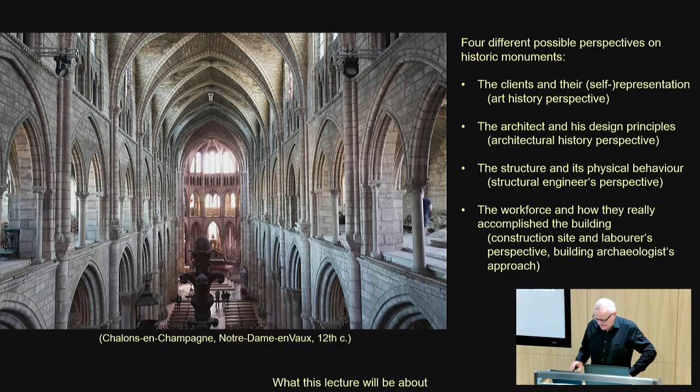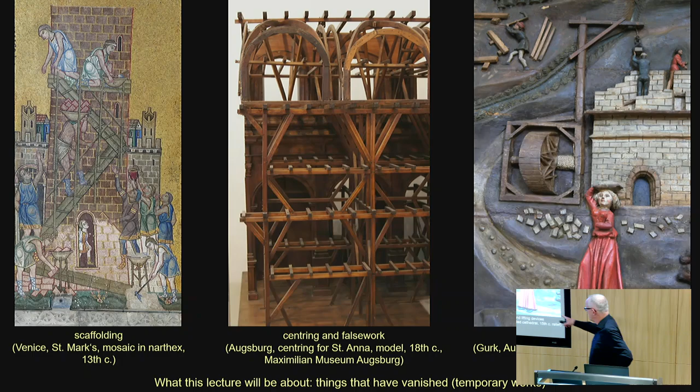The question is, of course, I cannot deal with everything, so I had to focus a bit. I'll tell you what this lecture will be about and what it will not be about. I will focus on temporary works, things that have vanished, like scaffolding, centering, and lifting devices, cranes, and stuff like that. This in the foreground here is also kind of a lifting device, right?

The next topic is which times should we cover? When I was asked to give this lecture, I was explicitly asked to focus on medieval history, but it is, in my opinion, almost impossible to deal with the Middle Ages without looking a bit into ancient technology as well, and also seeing how it continued after the Middle Ages. There's no sharp break between the Middle Ages and early modern times. Until the first third of the 19th century, the construction site didn't change almost at all. Therefore, it's useful to look also a bit forward into the 16th, 17th, 18th centuries if you want to look at medieval technology.

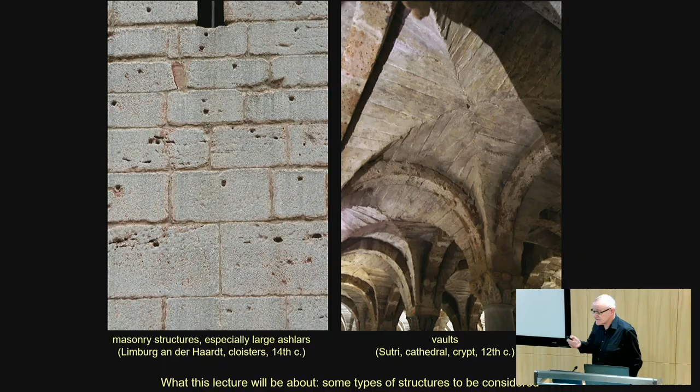Then, of course, which kind of structures are we specifically interested in? There are many structures I could talk about. I have a certain focus on historical timber structures, but this is not the topic today. So I will talk mostly about masonry structures, especially masonry employing large blocks, and about vaults, which is recently one of my favorite topics, history of vaulting.

Now the question is, if you are talking about things that have vanished, temporary works, what are the sources that we have? There are some fascinating sources, which you see here in these two pictures. The one on the left-hand side, a preserved centering for a bridge, that's unique—I don't know another example of that, that's in Austria, dated 1639. I guess they didn't know how to take it away, that's why it was left there. The other is a contemporary model of a bridge centering from the Rialto Bridge, which was brought to Nuremberg because they wanted to build a similar bridge there. These are outstanding sources, but unique sources.

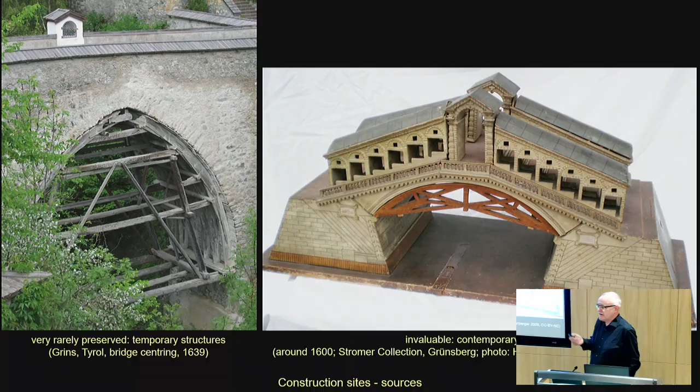It's difficult to tell a story only based on this kind of sources, since we don't have a large number of them. Then we can look to the building itself, and what is most valuable are unfinished buildings, where the process of construction has stopped at a certain point. One famous example is the pre-Parthenon temple on the Acropolis in Athens, where we have these unfinished drums of columns. We will see more of that in the lecture.

But of course, it's sometimes very difficult to interpret the on-site evidence, the on-building evidence, unless you have some explanatory contemporary pictures or descriptions of any kind. So pictorial sources are very valuable. This is a pictorial source about ancient lifting technology from Heron of Alexandria.

Okay, so with these preliminaries, I want to jump into my lecture. The lecture will focus on three key challenges which were typically present in a construction site before the age of mechanization, that is to say before the mid-19th century. The first challenge was to bring both man and material on site.

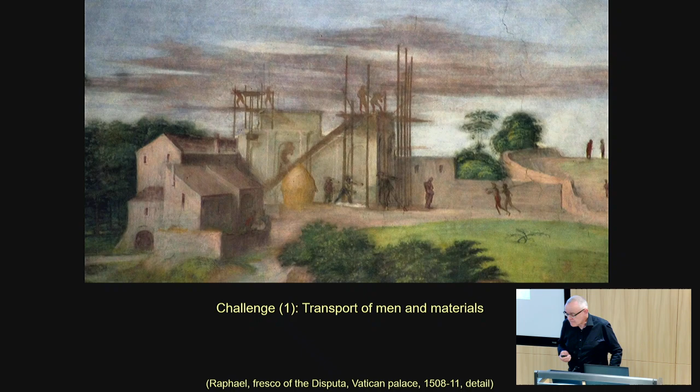This is very straightforward, since the key object on the historical construction site was the scaffolding, and the scaffolding didn't just serve for bringing people on site, but also to bring material on site. So the typical view of a construction site, like the one here, is without any lifting device, or with just a minor lifting device somewhere in the background. The key object is the scaffolding.

It took me a while to understand that the historical construction site was principally relying on the scaffolding. It was much more important than today. Today we view the scaffolding as something that brings people on site, but for material transport we think of the tower crane and stuff like that. This is really an extremely recent invention, and the historic construction site relied mostly on the scaffolding.

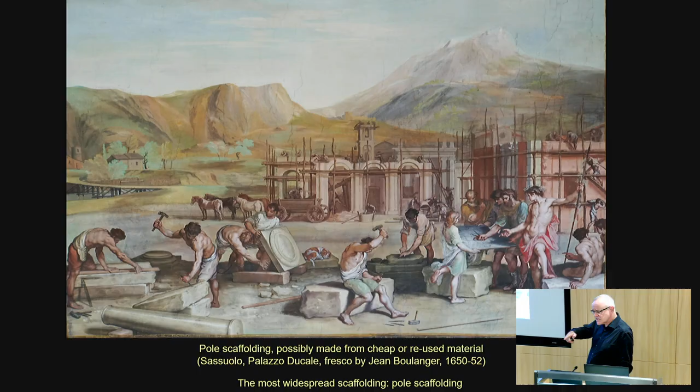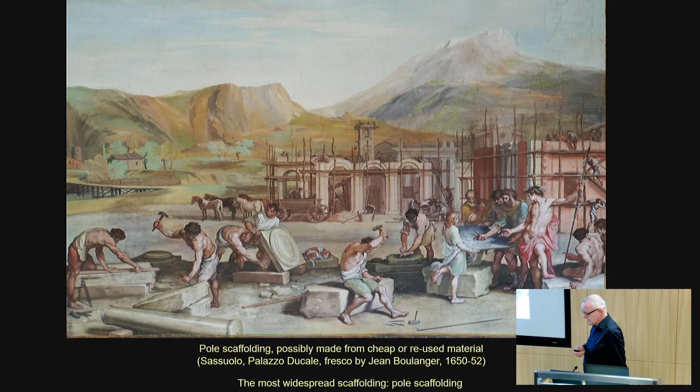So it's worth looking at the scaffolding, and this fresco from a palace in Italy shows many characteristic elements of the historical scaffolding. It was built from cheap materials, either cheap or potentially reused materials, or made in a way that it could be reused. These principal differences are there. What we see here is obviously a scaffolding made from cheap materials.

Everything was carried by men, by workers, by laborers on the scaffolding, on these walkways. That's one of the central functions of the scaffolding, not just bringing people on site, but bringing material on site.

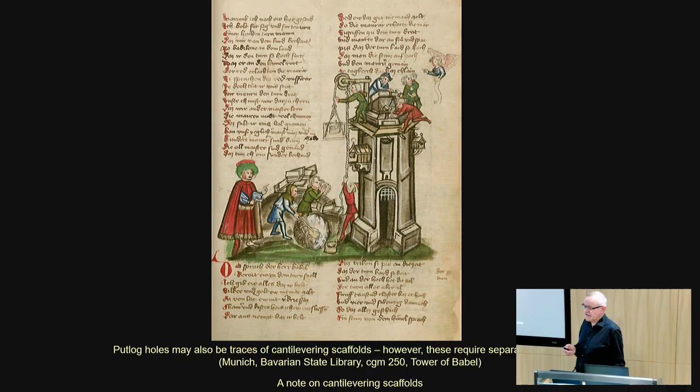Sometimes if you look at medieval pictorial sources, you will also find this kind of cantilevering scaffolding. I doubt that this was a standard thing. We have to keep in mind that most of the medieval sources where we see scaffolding are 15th century, and 95% of those represent the building of the Tower of Babel, which is a tower, a special structure where transporting material via the scaffolding is more difficult.

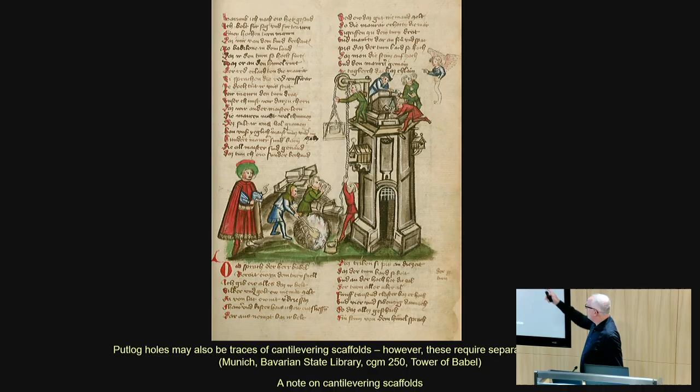So when we have this kind of tower-like structure, this cantilevering scaffolding might have played a certain role, but then you need a separate lifting device as well. Either you bring up the material inside the tower on the staircases, or you have a lifting device like the one shown here.

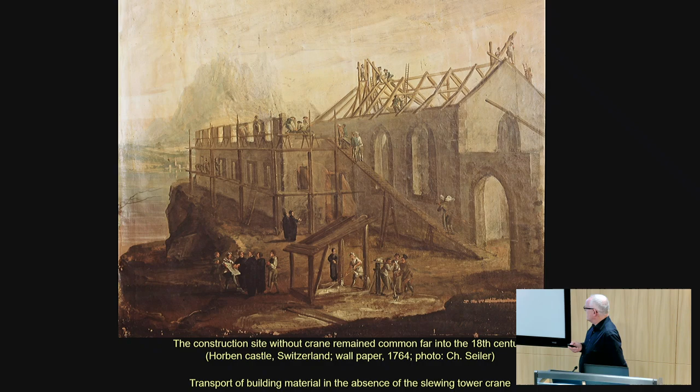Another example of the same, from a Swiss castle, where this long walkway serves people to bring mortar and stones up to the place where it should be assembled. Now there's a special consideration: if you want to use the scaffolding for transport of materials and also for storing materials overnight in densely built urban areas, then in the long run this simple pole scaffolding, with rope-tied connections, is too weak.

In the early modern age we see a development of pole scaffolding that relies not only on these poles, indicated in red here, but the poles then have only a stabilizing function. They are clamped and buried in the ground, serving as bracing. The actual load carrying works not through the long poles, but through short standards or posts that support the ledgers. The ledgers are the horizontal beams parallel to the facade, and on top of the ledgers the putlogs rest. This is much more stable and reliable than classical pole scaffolding, and it became very popular in the 17th and 18th centuries, becoming the typical scaffolding for building in urban areas.

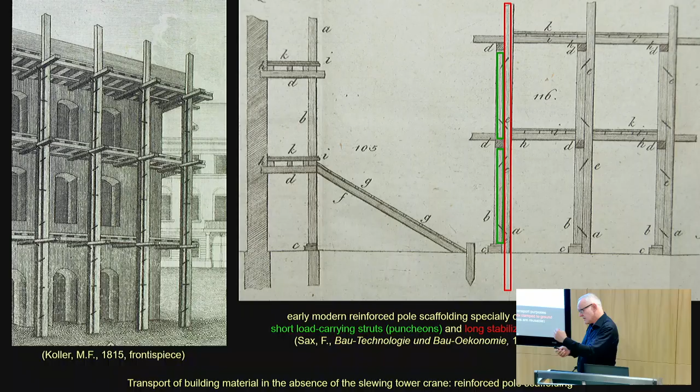This is now also made from squared timbers, and the connections are done with iron clamps, so the idea is that the timber pieces can be reused and easily disassembled and reassembled.

Here you see the comparison between the late medieval pole scaffolding with rope ties and this more modern pole scaffolding. For the workers, we have to go back another step, since the pole scaffolding was not the only essential thing - there's another type even simpler, namely the trestle.

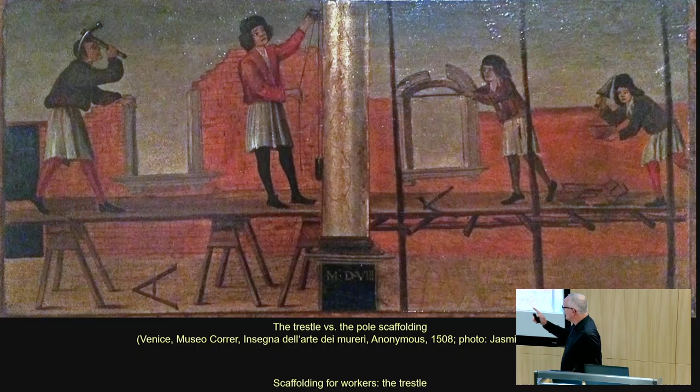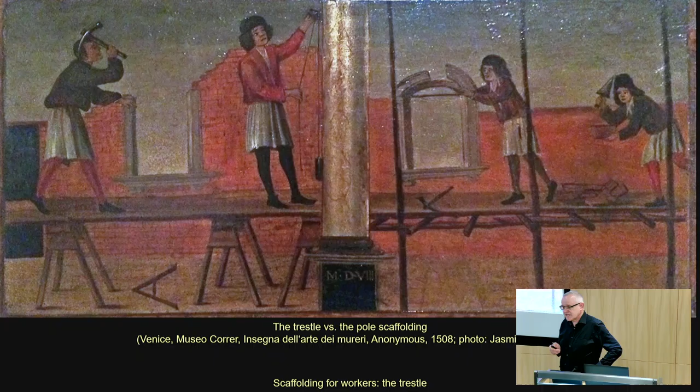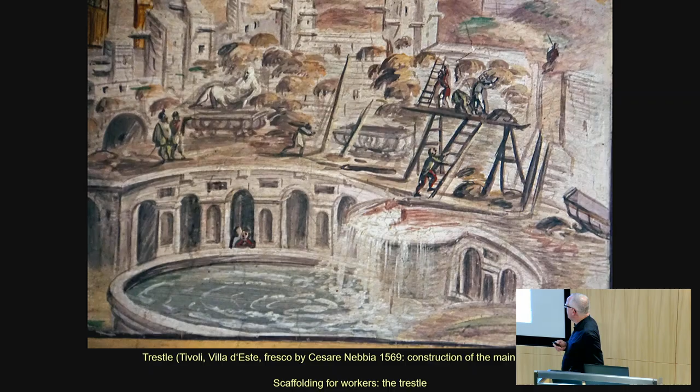Here, the typical bricklayer's scaffolding in historical literature is the trestle. In the back we have the pole scaffolding, but we also have the combination of both. Insurance companies today wouldn't like these too much, but that's in fact one of the key strategies that prevailed in the 17th, 18th, and 19th centuries for working with pole scaffolding.

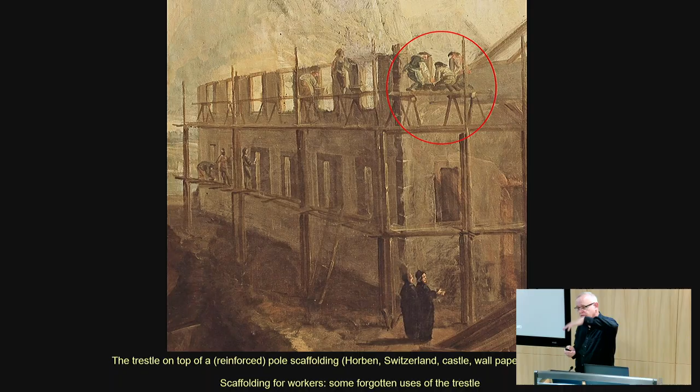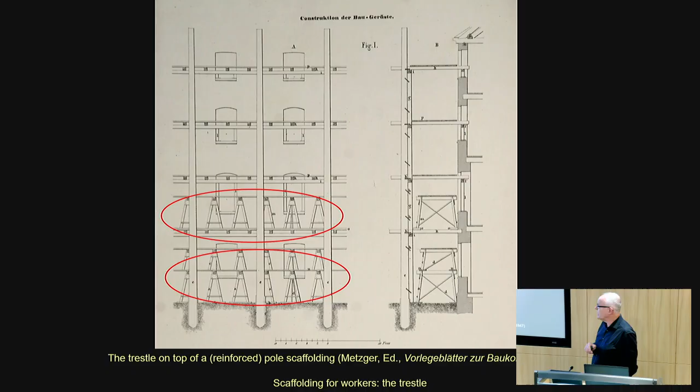That's not singular but very often found, and it even found its way into mid-19th century textbooks. This is a textbook for students of the University of Munich studying construction, and in it they advise using trestle scaffolding in combination with the typical classical pole scaffolding.

These are some more spectacular and unusual uses of the trestle. On the left-hand side, this is from Nicola Zabaglia's Castelli e Ponti, a book about temporary works mostly at St. Peter's. This is how they renovated the mosaic in the apse of San Paolo fuori le Mura in Rome without touching the structure or the marble-clad walls.

It was assembled as a huge stacked trestle. I have a bit of doubt whether this was really like that, but it seems authentic: when they built this steeple - the highest in the canton of Lucerne - they built this long approach via a trestle scaffolding. So the trestle is not to be underestimated.

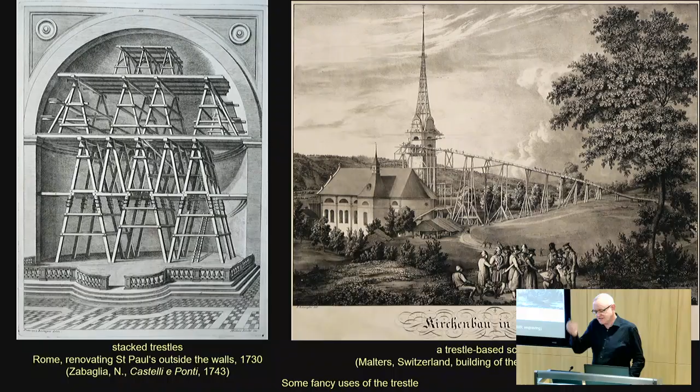Today we see the trestle as something very simple, like for painting your wall at home, but it had really a key role in historical scaffolding. That's fairly easy, but when it comes to lifting really big blocks, we have to go to some more advanced technology.

We see here when they lifted the huge slab covering the pediment of the Louvre eastern facade, a famous case where the key point was that this slab was very thin and very long, and had to be handled with special care, like a raw egg, so it wouldn't break before it was assembled.

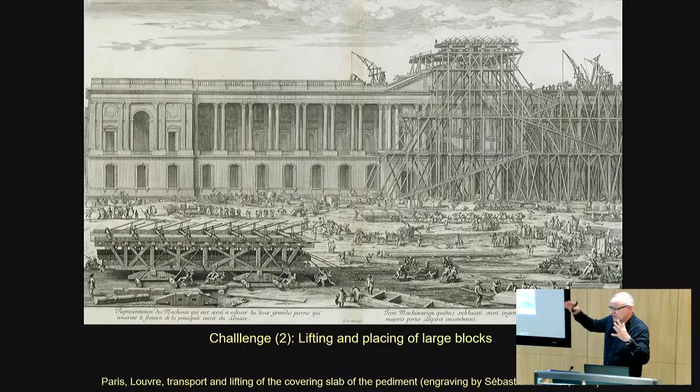I won't dwell on this too much, but I want to show both the continuity between ancient, medieval, and early modern technology, and on the other hand the breaks and loss of knowledge between these periods. One thing that turned out to be remarkably continuous is the way of attaching the load, the stone, to the crane or rope, across these different technologies.

On the left-hand side are medieval specimens from the Maulbronn Monastery Museum, showing both the Lewis and the tongs used for lifting stones. On the right-hand side is an excerpt from a 19th century construction book, which also shows some ancient technology. You'll see presently that this carried over without any break from antiquity to early modern times.

Here on the left-hand side you see the use of specialized tongs in the Temple of Poseidon, 4th century before Christ, in Sounion. On the right-hand side, 2nd century AD, the Porta Nigra in Trier, where the ashlars were clearly lifted by means of tongs.

This indicates that at that time these blocks were actually attached to a crane, not lifted by means of ramps or sand carried up a slope, but actually hanging on a rope. So to lift these heavy blocks from the architrave of the Temple of Sounion, you needed a really powerful lifting engine as well.

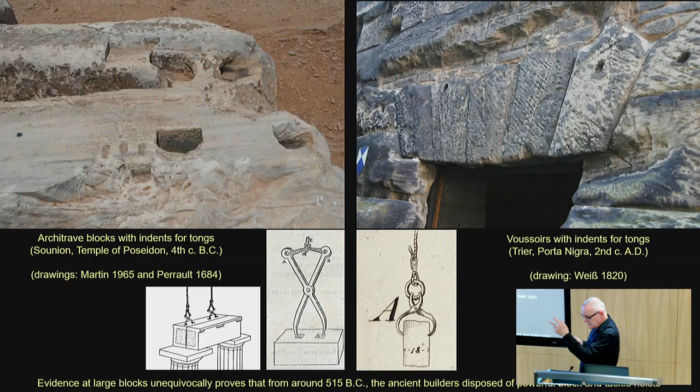We can see from evidence in Greek temples that after the late 6th century these traces keep reappearing, so we can be quite sure that the block and tackle was known and actively used in Greek ancient technology, and it continued into Roman and Byzantine technology as well.

On the left-hand side is something quite typical of Greek temples: this way of attaching the rope to the stone via a channel. On the right-hand side is a huge block, a triglyph from the Temple of Nemea in Greece, where you can see my notebook sticking in it — it has a trapezoidal shape.

This was intended for a huge Lewis, probably made of hardwood rather than iron or bronze — it's really huge. This Lewis hole is maybe 30 centimeters wide and 40 centimeters deep, so there was probably a wooden Lewis sticking in it when it was lifted.

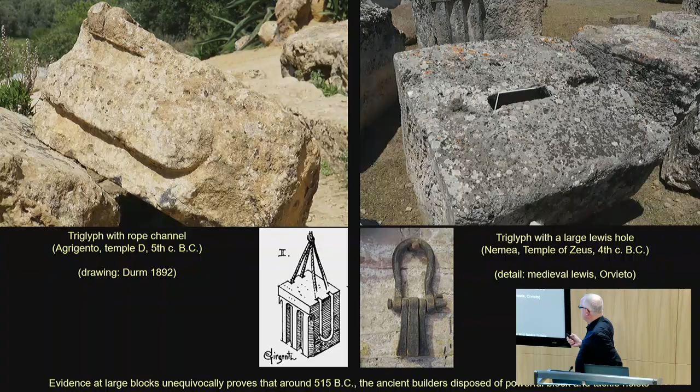And of course then you need a crane, and there we have this wonderful picture, which most of you probably know from the Vatican Museum, the Haterii relief, where you can see both the driving engine — this tread wheel on the right-hand side — and in the middle, the detail of the block and tackle, which enabled them to lift huge stones as well.

This is closely related to Greek philosophy, Greek mathematics of the 6th and 5th centuries before Christ, and mechanics — the knowledge of how to use block and tackle and understand its advantage. However, this was almost completely lost. We have almost no trace of block and tackle used after antiquity until the early 15th century.

What did continue were these ways of attaching the load to the rope. On the left-hand side, it's not very common, but in this picture from Colmar you can see a Lewis sticking in the block, so obviously they knew how to use the Lewis.

This huge block in the middle is from an 11th century church in Germany — it's a capital of a column, roughly one cubic meter of stone. It's quite heavy, but not heavy enough to definitely require a block and tackle lifting technique, and it has this Lewis hole.

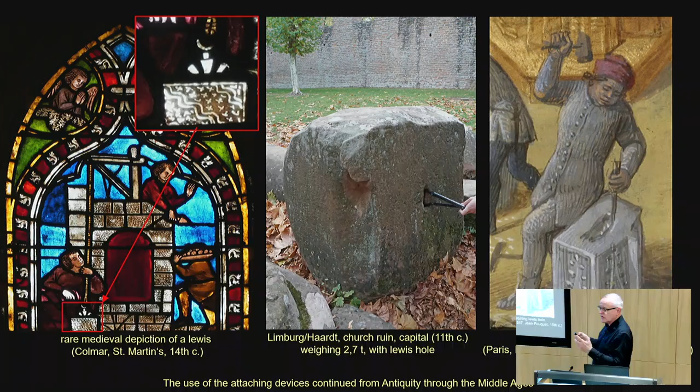On the right-hand side is a tiny detail from the famous illustration by Jean Fouquet on the history of the Jews, where you can see a mason working out a Lewis hole on top of a block — not a huge block like an architrave of a Greek temple, but at least a considerable block.

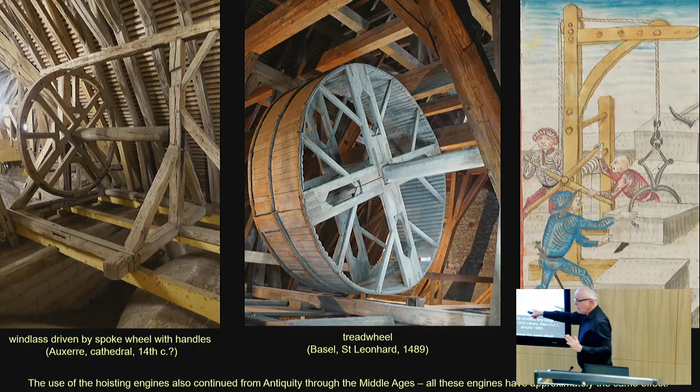This is unfortunately undated, on the left-hand side, this kind of windlass with a spoke wheel where you can pull with a longer lever than on the right-hand side. But in fact, all these lifting engines have the same power, more or less, since in the tread wheel - although it looks very impressive - you cannot walk up more than about 15 to 20 degrees from the vertical. So the length of the lever arm is quite limited. Although the tread wheel looks really impressive, its power is not bigger than the other two.

As I said, in the Middle Ages the knowledge about block and tackle was obviously lost, so we don't see any pictures of block and tackle before the 15th century. This Eastern Roman, Byzantine technology for lifting this little column seems quite basic. What they lacked was really the free pulley. They didn't understand the method anymore, and this is closely related to the fact that architects or builders were no longer connected to academia but were practically trained on the construction site. It required considerable theoretical knowledge to know how a block and tackle lifting device works, so we don't see any trace of that until the 15th century.

However, even with such simple technology you can lift fairly complicated stones. If you just pull on the rope, the size of the stones is of course limited, and also the typical medieval crane for most of the Middle Ages was not slewing - it was fixed in one direction - but you can still put a stone or assemble a stone with a non-slewing crane using the technology depicted.

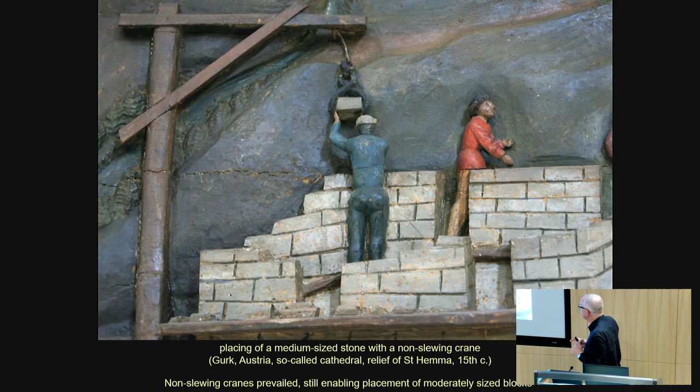Again, in this picture you can see that it was quite widespread in the 15th century to use these cranes, which could not rotate but were still helpful in assembling blocks - not huge blocks like in antiquity, but medium-sized blocks.

But then the 15th century is the big century of invention. We are used to think of the 15th century as the time when, in Italy, the Italian Renaissance came about with a lot of new ideas, influences of Eastern Rome, technology from antiquity transmitted through reading ancient texts. But this observation that there was a technology revolution also holds for the other side of the Alps, for the parts outside Italy. So the 15th century was very innovative on both sides of the Alps.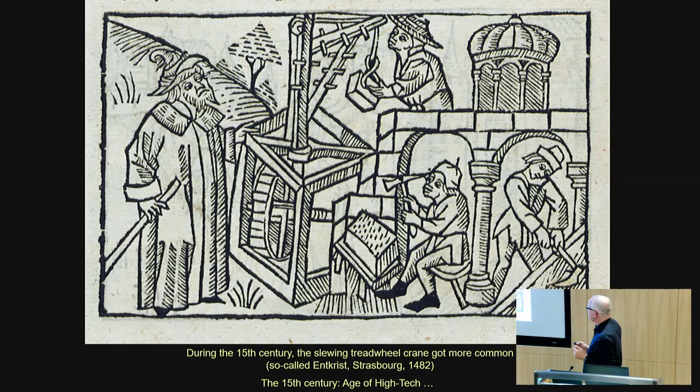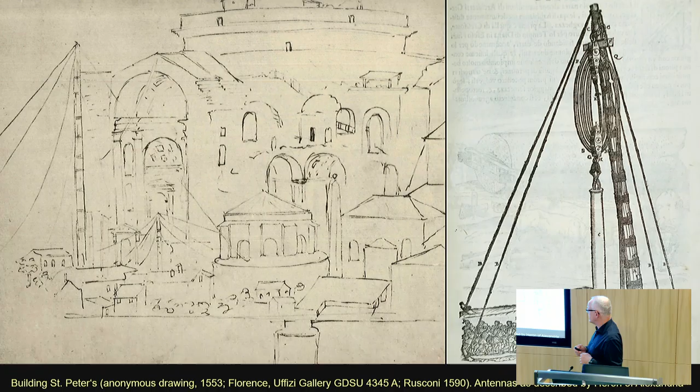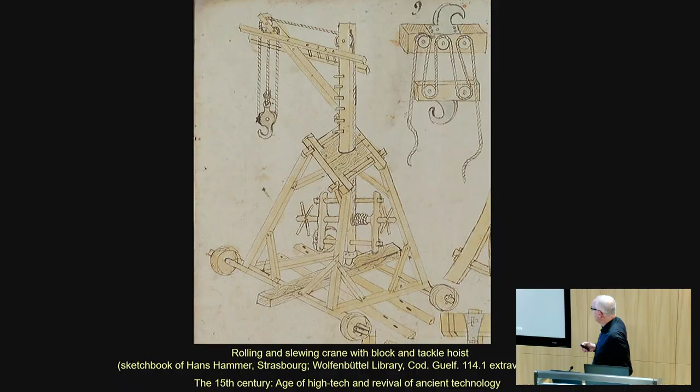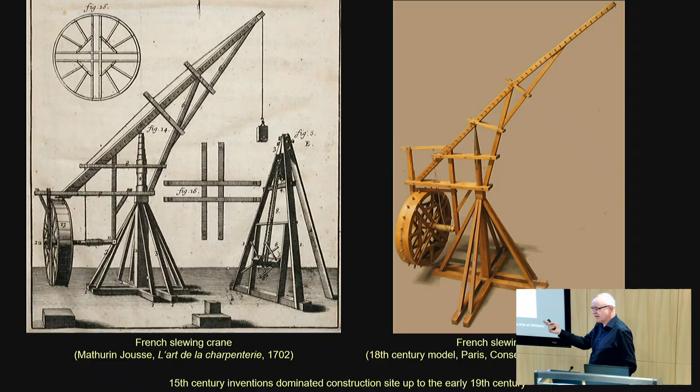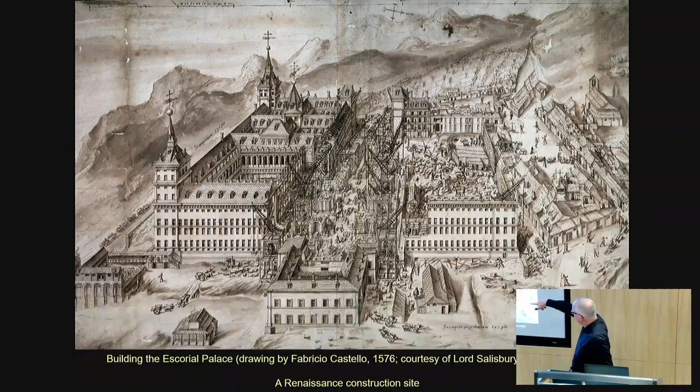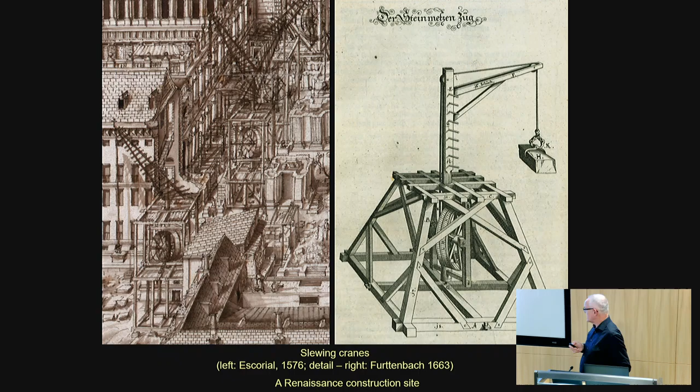So now my most favorite topic is actually vault erection. And here we will turn more to on-site evidence rather than just the pictorial evidence we've looked at before.

The Roman vault relies very much on opus caementicium, a mixture of fist- to head-sized rubble and a lot of hydraulic mortar with pozzolana. It relies exclusively on the formwork, poured in horizontal layers—one layer of mortar, one layer of stones on top—until it ends at the top with a horizontal surface. That's how the Romans built it, relying 100% on the scaffold, the falsework, the supporting centering, which defines the form of the vault. Here on the left is a view of a vaulted basilica in the ancient Roman theater of Taormina, where you can see some of the putlog holes which probably supported the centers for the falsework of this barrel vault.

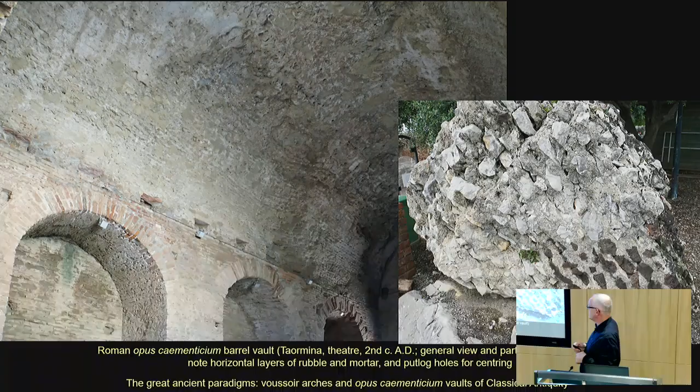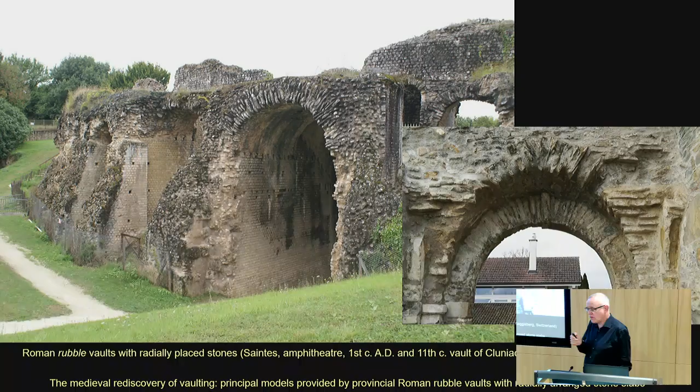However, this was not the key reference for medieval builders who reinvented vaulting—they were more looking toward provincial Roman technology. There we see vaults of a different kind. Here on the left is the amphitheater of Saintes in southern France, a rubble vault with radially placed stone slabs, different from the typical opus caementicium with amorphous rubble. It has thin slabs oriented in a radial direction. This is widespread in ancient Roman technology in France, and France was probably one of the places where vaulting was reinvented in the 11th century. I show you an example from Switzerland, because in this collapsed vault you can see very clearly that it's also composed of radial stone slabs.

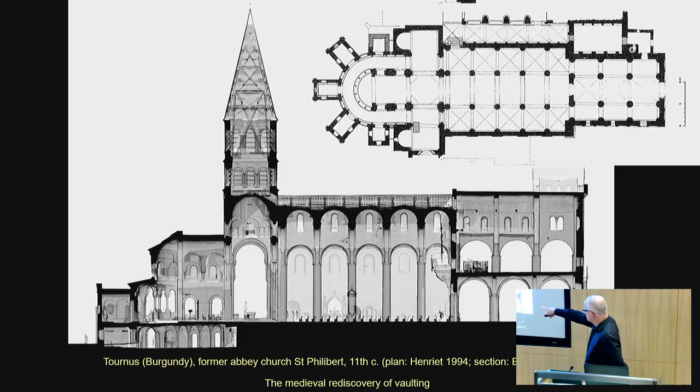One of the first major buildings in France was the Abbey Church of Tournus, built during the first half of the 11th century—one of the first entirely vaulted churches, one of the first entirely vaulted buildings, after antiquity. They started in the east with the crypt, then built the western Galilee, this narthex or porch, and ended up building the main part of the church in the middle. Almost everything is vaulted with either monumental barrel vaults or cross vaults. We'll look first at the oldest vaults in the crypt, then at the vaults in the lower story of the Galilee, which are groin vaults.

In the crypt, you can see the traces of the formwork very easily with the naked eye—very coarse traces. Why are they so coarse? It's evident these were not boards cut with a saw, but short pieces, short logs split with an axe—a very easy, straightforward process, like making logs for your fireplace. Once the formwork was completed, a thick layer of mortar was applied, then stones were set radially into that mortar layer, and the joints between the stones were filled with mortar. This wasn't exactly Roman technology, but similar to provincial Roman technology. They could leave it as rough as that because they probably planned to plaster over it anyhow, and the roughness might even help the plaster adhere better.

So what was obviously beneath was very densely spaced centers, with the short log pieces overlapping like tiles on a roof, supported at the places where the centers were.

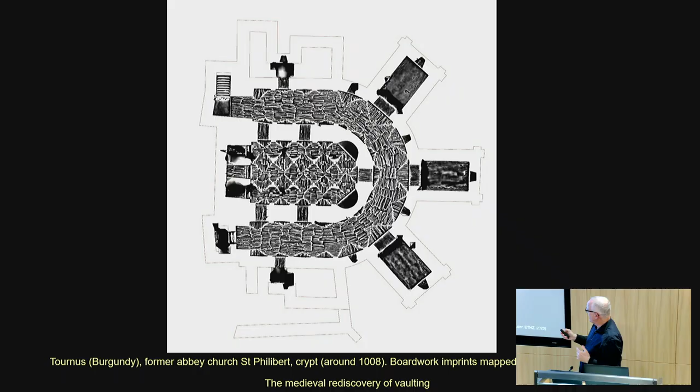At each place where these boards or logs are overlapping, there must have been a center, so we have a very dense sequence of centers. That means the centers can be very light because they don't have to support a huge load. We can use these short logs, which can be re-employed for some other purpose afterwards. And so it's possible to do this barrel vault.

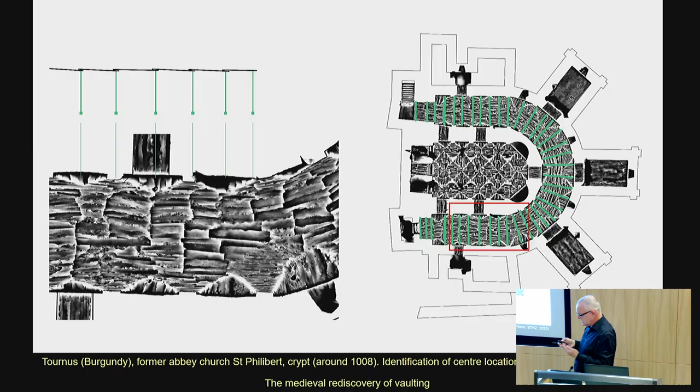There's one unique pictorial evidence for 11th and 12th century vault construction: this detail of a relief from the Cathedral of Basel, where you can see exactly such a dense sequence of centers, and a mason attaching boards to this dense sequence of centers to build the barrel vault. This is from the relief of Saint Vincent, a saint who was brought to Spain, where they built a chapel for him, ending with this depiction of the vault being finished.

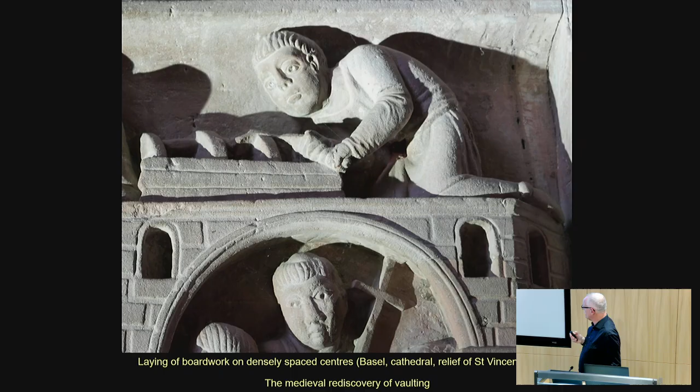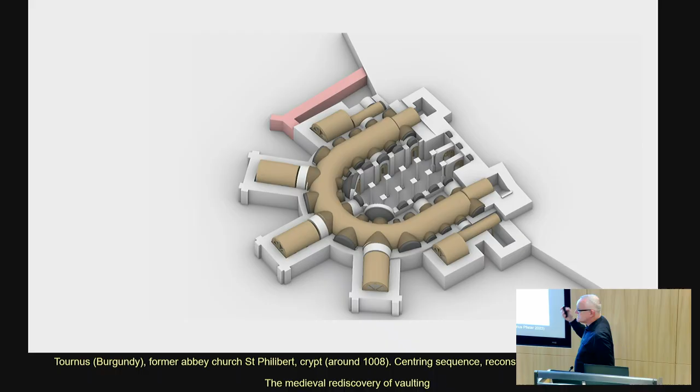So for Tournus, we could very easily reconstruct the building sequence. Obviously everything was done completely with full centering. First they put these logs on the centers, then they attached lunettes, and then they could erect on top of that the vaults that looked a bit like a cross vault in the crypt and like a barrel vault with lunettes in the ambulatory.

This technology of very densely spaced centers continued in Burgundy far into the 12th century. We can see many buildings with clear traces of very densely spaced centers, even though now the profile of the vault is slightly pointed, but still the centers are very close, using these short, rough pieces of wood as formwork.

But now if we go to the Galilee, this lower part of the western narthex of the church, the picture is completely different. First of all, this is a true groin vault. It has more or less a horizontal ridge and looks very nice, so you don't see the traces with the naked eye easily.

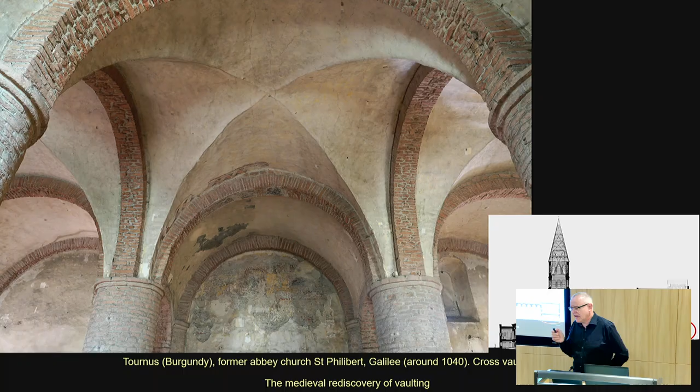But it's still possible to identify the traces of the formwork. What we did was a geometrical laser scan of this structure, and then we analyzed what we got from the measured point cloud.

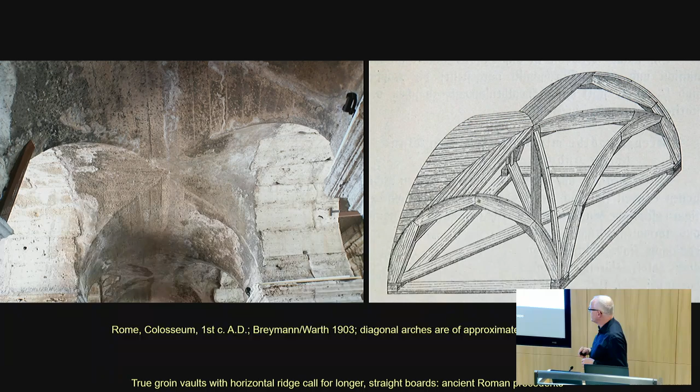It's clear that they didn't work like the ancient Roman architects with elliptical centering over the diagonals; instead they had obviously only circles. The Roman groin vault has horizontal ridges and long boards supporting the load - that's how you can reconstruct the example of the Colosseum in Rome, showing the ancient Roman technology.

But if you go back to Tournus, it's clear that all these arches - both the bounding arches of this vault compartment and the diagonals - are all circles, but the bounding circles are stilted, whereas the diagonal circles are surbased. So we have a segmental arch on the diagonal and stilted arches around, which still enables a more or less horizontal ridge, essential because you have the upper story above.

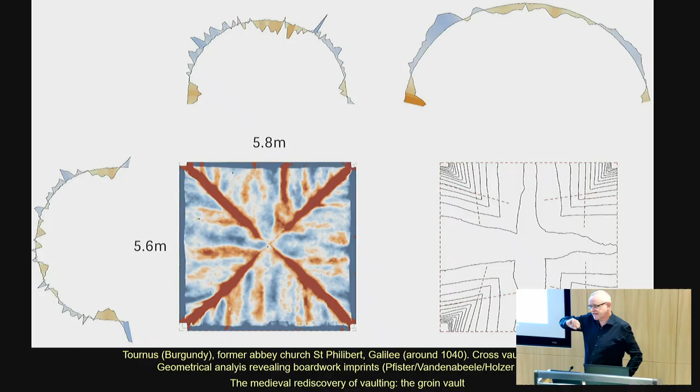Once you've measured all these details, you can model them, and also model an ideal surface that would result from these circles. If you put a smooth surface between the bounding arches and measure the deviation between that ideal vault surface and the measured surface, you get the deviations - this color picture on the left shows the deviation between the ideal smooth surface and the measured surface, and again we can see the traces of the boards.

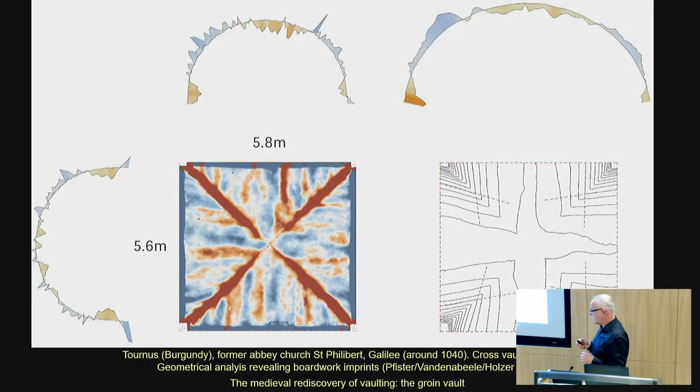However, now we realize there were longer boards, and they were obviously also a lot smoother than in the older crypt. So it was something like this: stilted arches around, segmental arches in the diagonal, and more or less longer smooth boards that had to be cut by the saw. Also, they are wider.

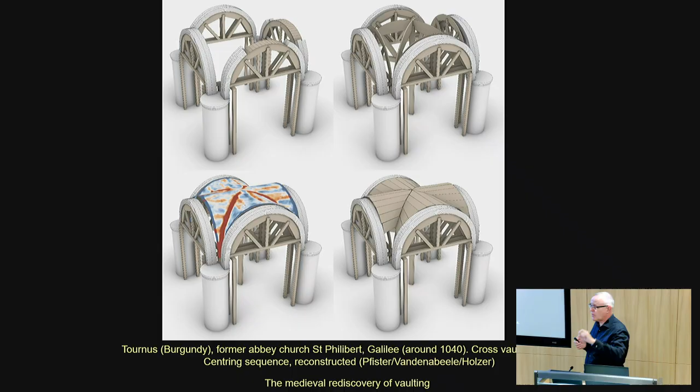This picture is now exactly Tournus, so the boards are also wider. We could reconstruct that the centering must have looked like that. It's evident from findings in situ that first the four bounding arches were built, then they erected a separate new centering inside this square to build the groin vault itself, which goes a bit above the apex of the bounding arches, using fairly wide, straight boards cut with a saw. So there was a considerable advance in technology. However, this had limitations, since if the span of the boards is too long, they will deflect, and then you need to dream up something—either use very thick boards or some other means.

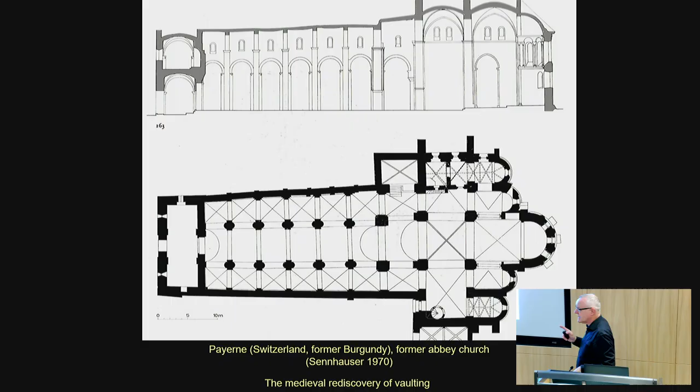Again, you have this kind of narthex. The larger part of the church is vaulted with barrel vaults, but the eastern parts, which you don't see very well here but will in the next picture, are cross-vaulted, groin-vaulted, and there's even one rib vault in the crossing. These are the eastern parts, probably erected around 1100. They're not precisely dated, but must have been finished around then.

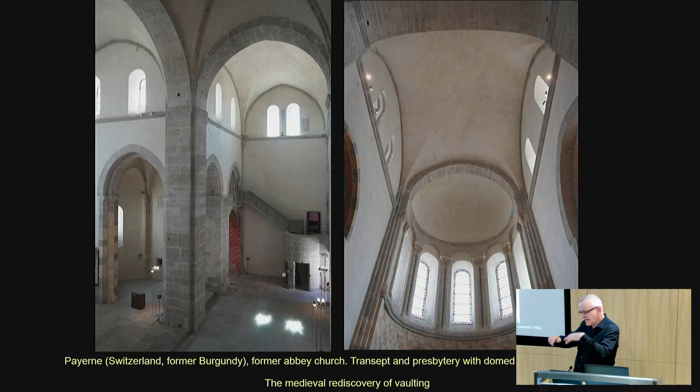What you can see here doesn't always look like a groin vault, but resembles a bit of a dome. The groins are clear in the lower part of the vault, but vanish towards the higher parts. This has to do with the fact that these vaults don't have a horizontal ridge, but from the upper side they look like that—almost like cupolas.

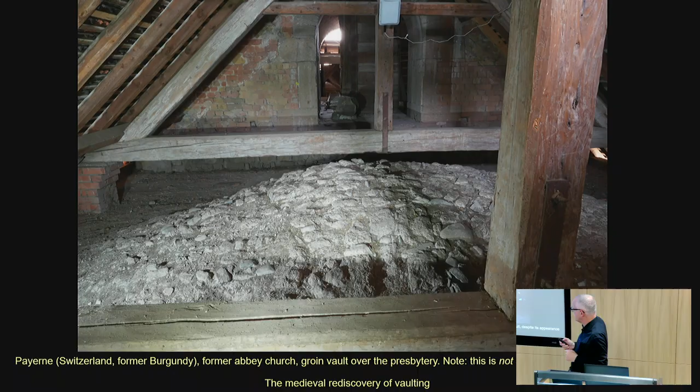But now, how do you build such a thing? First, the span is now quite considerable, between 6 to 8 meters. You cannot use straight boards because then you don't get this domed shape, so you have to use shorter boards, which is also good because you have to bridge a larger distance. Basically there are two different approaches possible: one with additional centering supports for each of these doubly curved severies, parallel to the bounding arch, or orthogonal to it—either the left way or the right way. The question is, which technology was really used?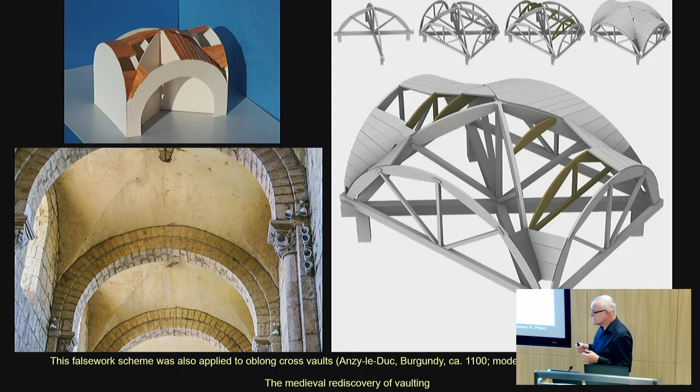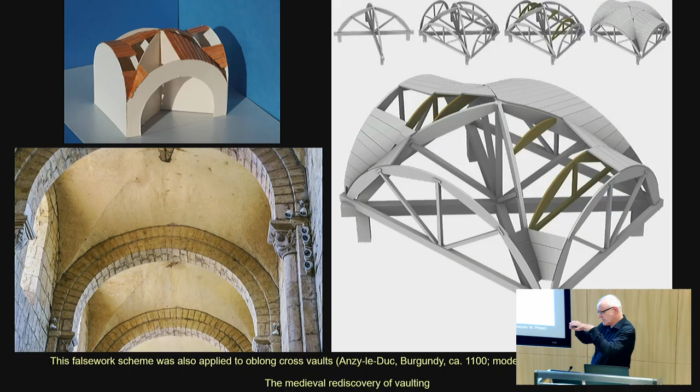I have currently a PhD student, Marius Pfister, who is working on Burgundy and on vaults in Burgundy, and even in these quite advanced oblong cross vaults of Anzy-le-Duc, which are considered some of the earliest cross vaults on a rectangular, not square, but rectangular basis, he could also identify traces, formwork traces, and then reconstruct the supporting structures with centers parallel to the bounding arches supporting this formwork for these very nice cross vaults, as shown on the right-hand side.

So now the question is, the question that I also ask myself all the time, did everything change with the advent of the rib? Or was the technology already there before the rib was introduced? And the answer is, almost nothing changed with the advent of the rib. We see basically the same construction principles of ribbed vaults as for the groin vaults.

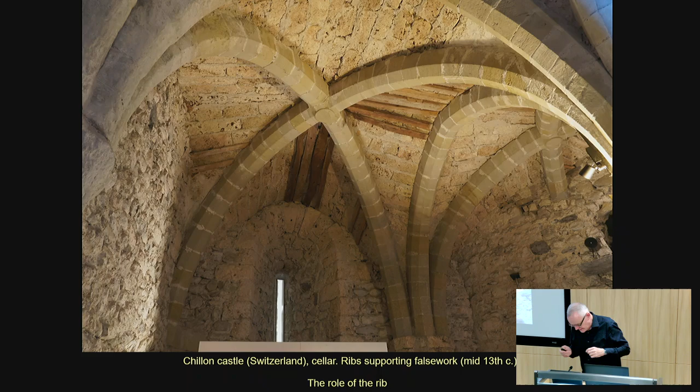The rib could serve as a support for the false work for the severies. So here we have proof where the historical laths supporting the masonry of the severies are still in place. This is from the cellar of the castle of Chillon, this nice castle in the lake of Geneva.

And so this means, of course, you still need a diagonal center to support the rib. But then you can assemble the rib on top of the centering, and then you can use the rib as a support, as a kind of a lost centering or as a kind of a permanent centering for the severies. And then you have these short and narrow pieces supporting the masonry of the severies.

Here they are also in cut stone with wide joints, with wide mortar joints. This is why you don't need a continuous boarding, which you need only if you have small stones or a lot of mortar. If you have cut stones, if you have ashlar, then you can use this kind of support on individual laths. This is not the only example for that. There's another example in what is today Czechoslovakia.

So again, these are all examples from the 13th century where we have still some of this formwork in place, and it tells a clear story how the vault was built and conceived. However, this was already quite usual in the 12th century, so it comes more or less directly with the introduction of the rib, comes this use of the rib as a permanent centering.

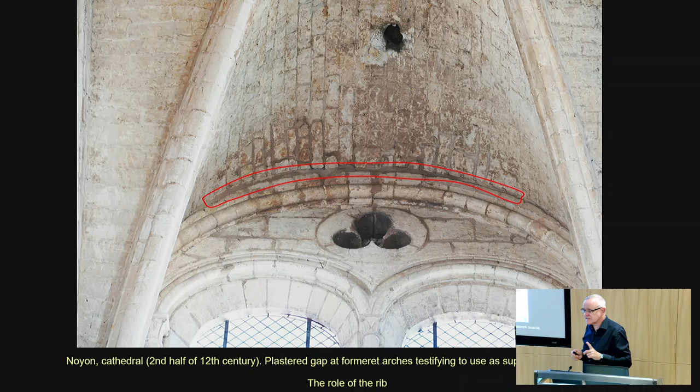And if you have a close look at Gothic vaults up to the early 14th century, you will find many, many examples where you can identify this gap, not only at the formeret arches, but it's a bit harder to see also at the diagonal ribs. So this was very common.

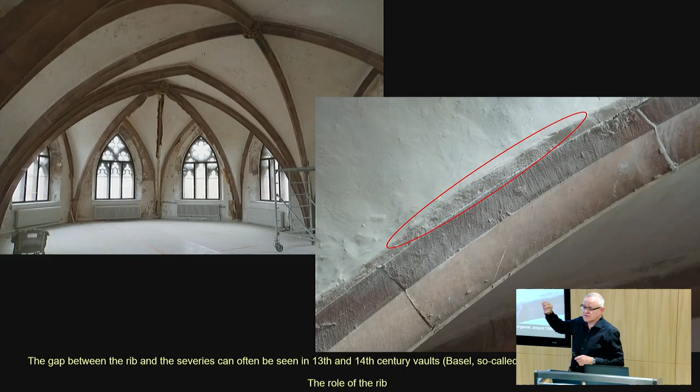It's 8 centimeters deep, so I was able to poke my little ruler in between the plaster and the ashlar, and it's about 3.5 centimeters high. So just enough to insert a nice board, which you can use to erect the severies.

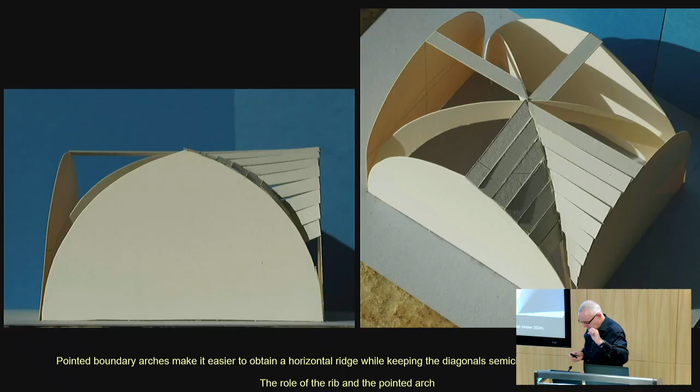So the main advantage of the Gothic vault compared to the Romanesque vault is that the pointed arch makes it a lot easier to get a horizontal ridge. If you have a horizontal ridge, then you can use long, straight boards. And if you have pointed arches, you can easily achieve a semicircular diagonal, while all the other arches are slightly pointed and still reach the same height, and you automatically get this kind of boarding.

Since the diagonal arch is longer than the bounding arches, the boards will shift a bit in direction from top to bottom, and this is exactly what you can also see in the masonry in situ in these buildings, that the courses of stones are shifting a bit too. You start at the top with the first board, then put the other boards, and automatically get a nice formwork, which tells you how to lay your nicely cut ashlar stones, which became popular around 1200 for rib vaults in France.

But even the method with densely spaced centerings and intermediate supports continues into the Gothic age. Here's an example from the Church of San Flaviano in Montefiascone, a 12th century church extended in the early 14th century, 1301. You can see in this plaster or mortar the imprints of a centering which looks very similar to what we've already seen 200 years before in Anzy-le-Duc and these other late early and high Romanesque buildings.

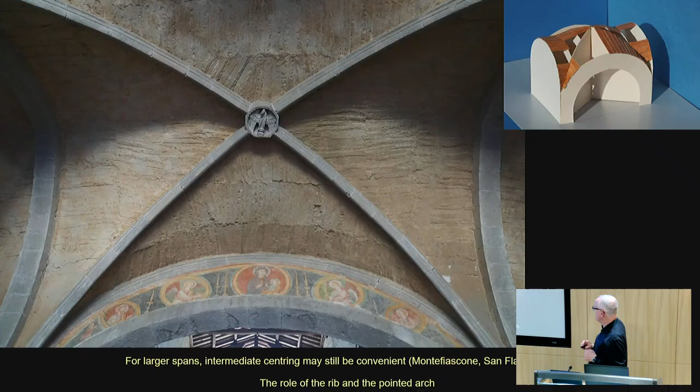Now, of course, as a structural engineer, we are not only interested in the formwork, but also in the supporting structures. But there we can rely much less on actual evidence in situ, and have to go back to pictorial evidence.

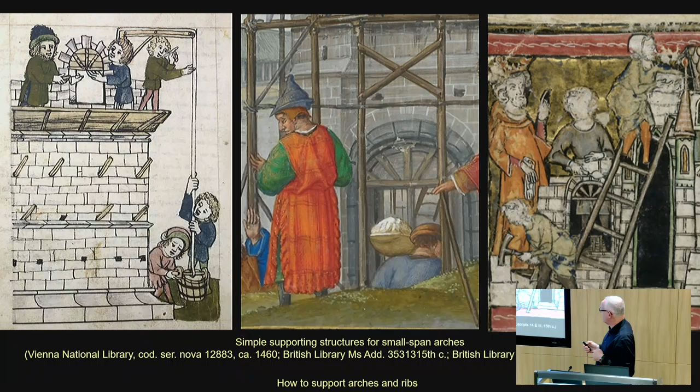What is interesting here is that this centering is always based on the ground. So the centering is not some structure hanging in the air high above the floor of the church, but you build a centering from the ground up to the top. Anyhow, you need the centering to assemble the huge stones typical of the considerably sized stones of the Gothic cathedral, and you need some kind of platform on top.

So you always have a centering or scaffolding, a temporary structure which rests on the floor of the church, reaches up to the vault level, and then at the vault level you can erect the diagonal arches for the diagonal ribs, the diagonal centering, and then build the vault on top of that. These are early modern pictures, but we can be quite sure the Gothic age used very similar centering. There's another very nice, even older, description of a centering in Vincenzo Scamozzi's Idea dell'Architettura Universale.

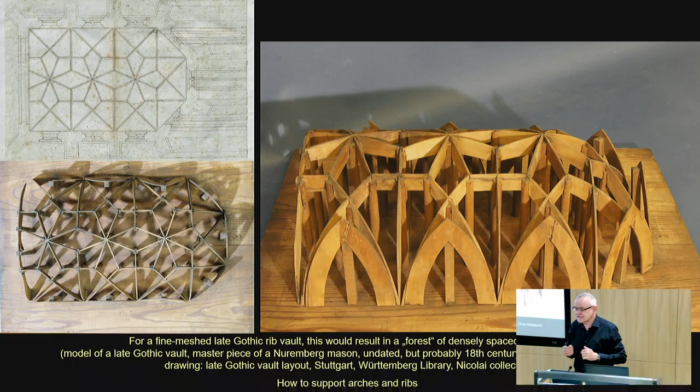This is late Gothic, and in late Gothic things changed a bit because these fine meshed vaults came up, and then you don't need any formwork anymore for the severies because they can be done in brick, thin brick shells which can be assembled free-handed. But you still need to support the ribs with appropriate centering, and this is a model of a centering from Nuremberg.

This was a masterpiece of a mason from Nuremberg, and they always had to solve the same problem: this ground plan depicted on the left side, and then they had to devise the geometrical shape of the centering for this kind of star vault with these trapezoidal compartments.

What is interesting for us in our context is that each point where these centers meet is supported by a vertical post. So again, very much everything is supported from below and not some fancy structure hovering somewhere in the air. This is further confirmed by other pictorial and archival evidence.

What you see here on the right-hand side is a detail from the well-known Tower of Babel of Peter Bruegel, where you see again that the centering for the vaults is supported from the ground.

On the left-hand side you see a comparison between a centering that is supported from the ground, from the floor, and a free-spanning centering. This is, in fact, from a letter of Galeazzo Alessi, who was the architect of the Basilica of Carignano next to Genoa.

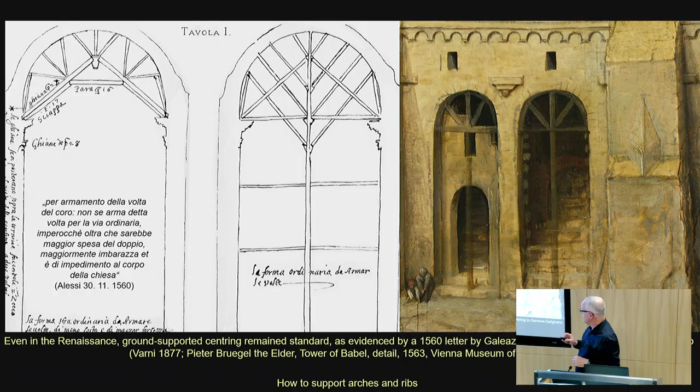Even in St. Peter's, where we had the first experiences with this wide-spanning, free-spanning, not-supported-from-below centering, for the smaller vaults, the barrel vaults, you can see that even in the middle of the 16th century, they were still using ground-supported centering, very much the same as was probably used in the 15th, 14th, 13th century Gothic cathedrals. So the technology carries over from the Middle Ages to the early modern, great early modern projects.

Now, I didn't cover some topics in this lecture because my time is over, and that's my last slide. So what I didn't cover here, which would have been a really interesting topic as well, is bridge construction. I show you on the left-hand side these four pictures, three of them bridges, and the last one is St. Peter's in Rome, according to the fresco of Giorgio Vasari in the Sala dei Cento Giorni in the Palazzo della Cancelleria in Rome. This is how the huge barrel vaults in St. Peter's were built — this was, in fact, really a free-spanning center, an extremely great innovation of the early 16th century, very closely related to contemporary bridge building. So I didn't cover bridge building.

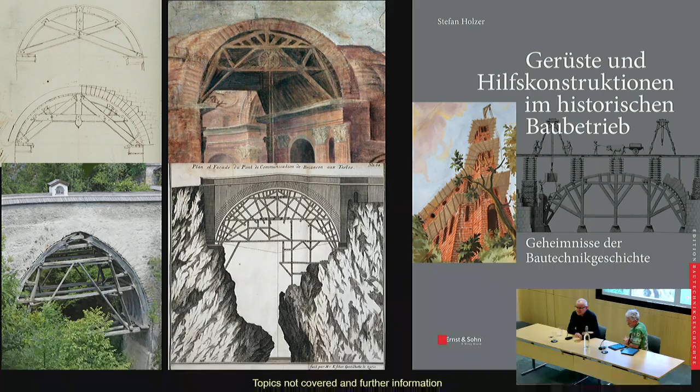Okay, that's not really my main area of expertise. I know that surveying devices were extremely good already in the 16th century. For example, Specklin, a military architect from Strasbourg, surveyed the city walls of Strasbourg, which were about 30 kilometers. He reported very proudly in his book that he ended up with a difference of 20 centimeters or something like that. So they had quite precise measuring devices, especially for measuring angles, already in the 16th century, and they did very careful measurements.

So I can only say that probably in the 16th century, technology for precise measuring was around, but medieval buildings are typically not very precise. If you measure them, you always find that right angles are not really right angles, and things that look straight are kinked and so on. In the Middle Ages it looks very precise, but if you have a close look, most medieval buildings are rather imprecise.

Any more questions in the room? Yes, back there. Hi, thank you for the talk.

During your research and studies on what you presented, did you come across any recorded failures of temporary works? And at a later stage, did you come across any better versions of a failed temporary works solution they had?